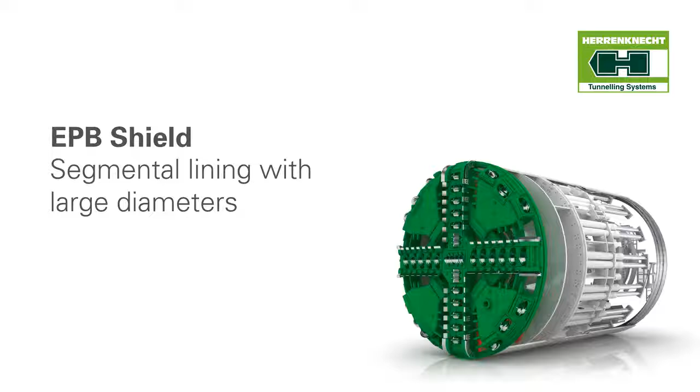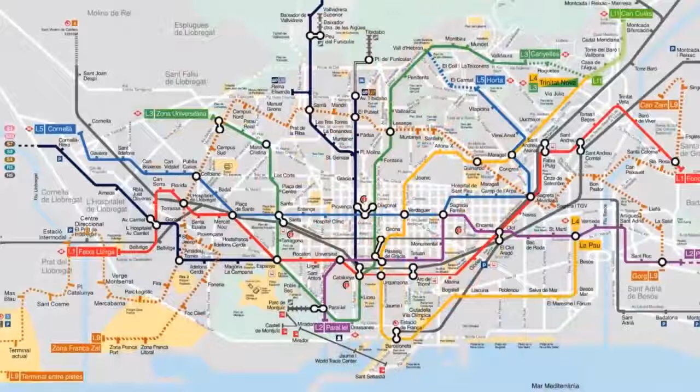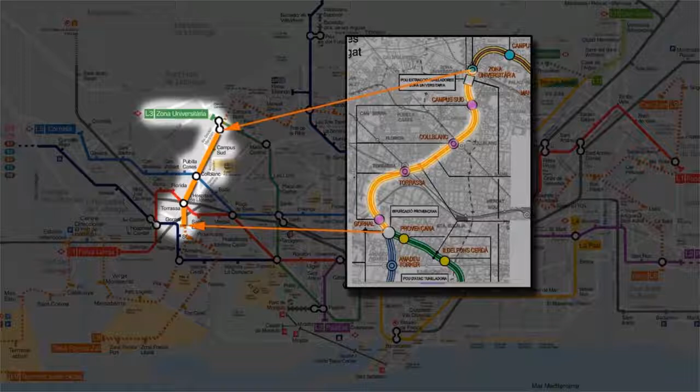The following computer animation shows the way earth pressure balance shields work, taking as an example the Herrenknecht EPB shield used for a subway construction project in Barcelona. As part of the extension of Subway Line 9, the machine S442 excavates a 3.6-kilometer-long section between the subway stations Gornal and Zona Universitaria.

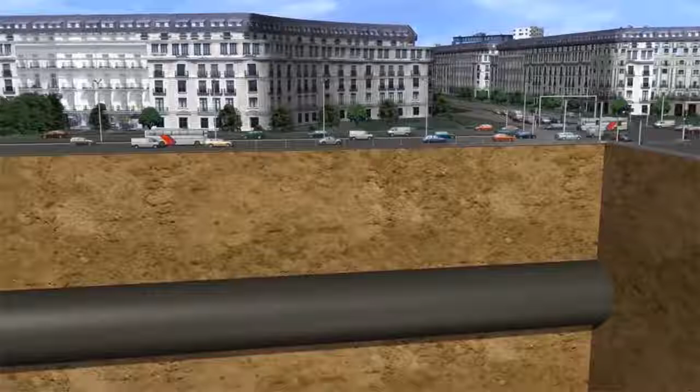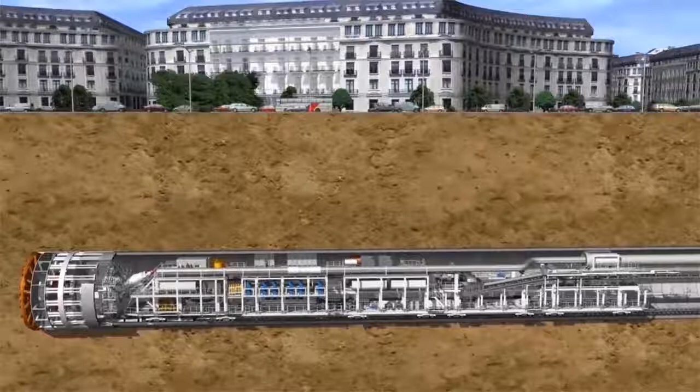The tunnel route crosses beneath Barcelona's historic city center, densely populated residential areas and roads. In order to avoid any damage to the sensitive buildings, subsidence, heave, and vibrations must be avoided at all cost. In addition, the impact on traffic above ground must remain as small as possible.

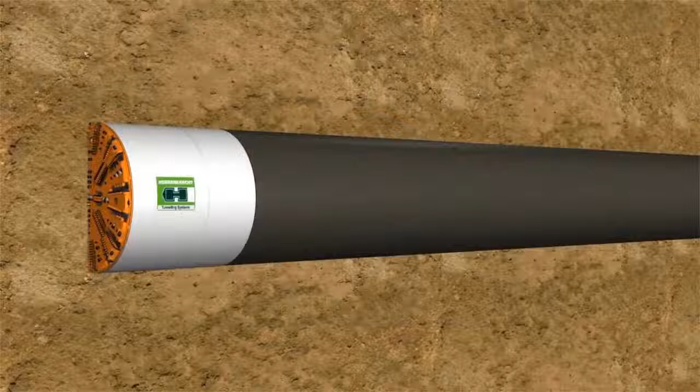The S442 is a classic EPB machine with an outer diameter of 12.06 meters and a total length of 95 meters.

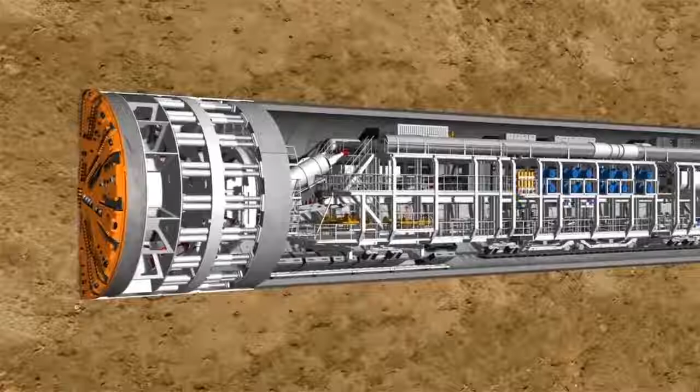With its rotating cutting wheel, the tunneling machine breaks the material from the tunnel face. The material is then transferred to the belt conveyor system in the rear of the shield via a screw conveyor, while the hydraulic cylinders press the machine forward continuously.

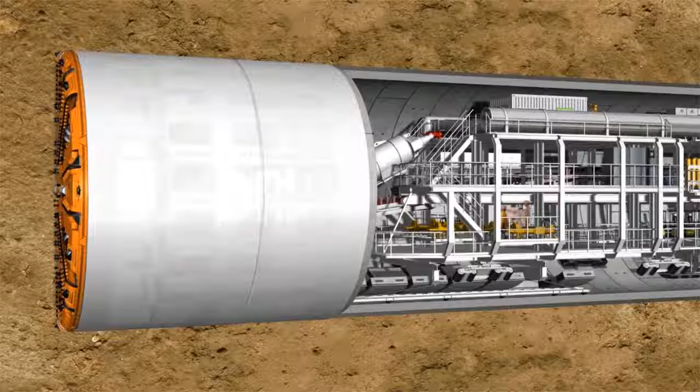The reinforced concrete segments, known as lining segments, are installed under the protection of the shield skin. When the ring building has been completed, the machine can push itself against the new tunnel ring and drill further into the soil.

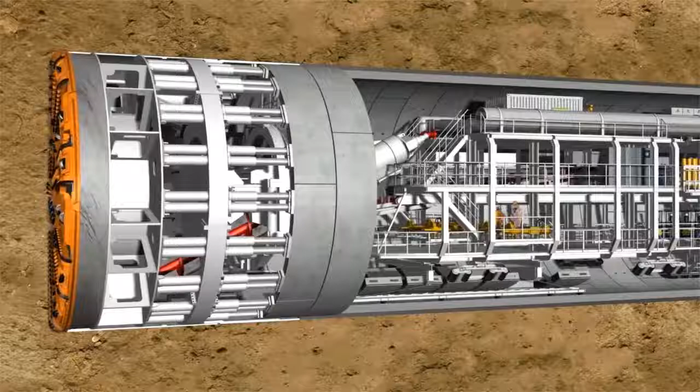The 83-meter-long backup accommodates all logistic facilities necessary for the operation of the overall system. The working method of an EPB shield is basically made up of two phases: the tunneling phase and the ring building phase.

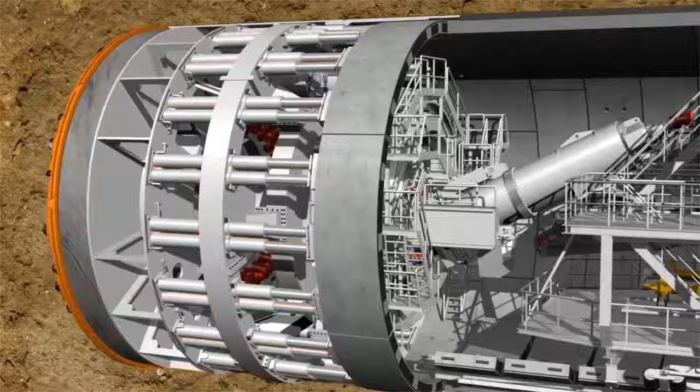During the tunneling phase, the cutting wheel, which rotates at a speed of up to 2.7 revolutions per minute, is pressed against the tunnel face with a pressure of up to 400 bar by means of hydraulic cylinders. 24 hydraulic motors drive the cutting wheel via a gear rim, developing a drilling torque of up to 38,000 kilonewton meters.

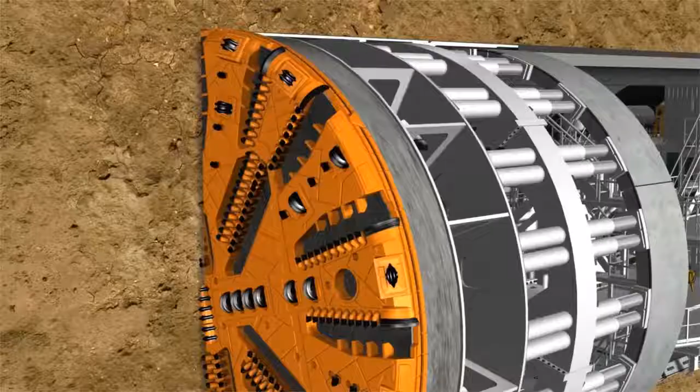Under this high pressure, the disc cutters and cutting knives made of high-strength steel loosen the material at the tunnel face.

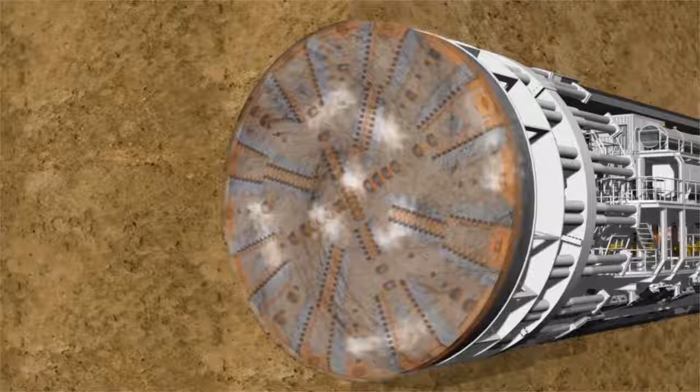If necessary, the soil can be conditioned with water, bentonite, or foam using the injection systems located on the backup. With the help of nozzles integrated into the cutting wheel, the corresponding conditioning medium is injected into the soil, which is pressed into the excavation chamber by the existing earth and groundwater pressure.

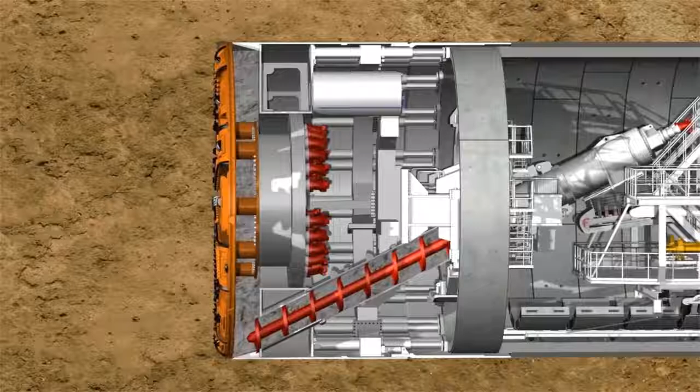For shield tunneling in non-stable soils, a loss in stability at the tunnel face is compensated by creating a support pressure. In the case of the earth pressure balance shield, the soil which was excavated by the cutting wheel is used to support the tunnel face.

In order to reach a state of equilibrium, the support pressure is transferred by the hydraulic cylinders via the bulkhead to the soil, which avoids an uncontrolled penetration.

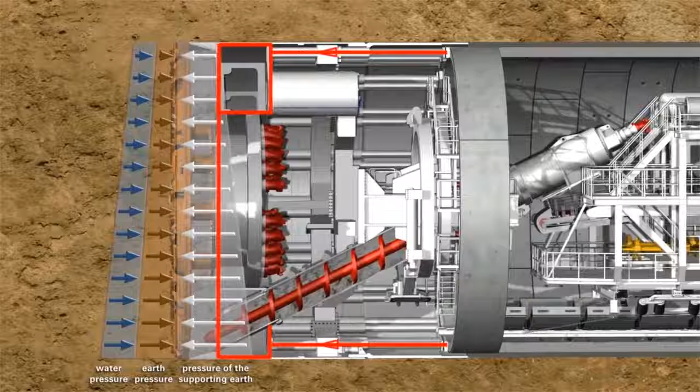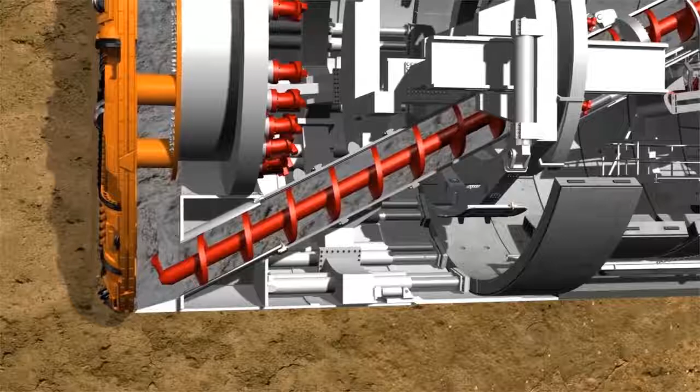The soil prepared in this way can now be transported from the invert area of the excavation chamber to a belt conveyor by a screw conveyor. The screw conveyor is driven by two hydraulic motors which have a power of up to 400 kilowatts.

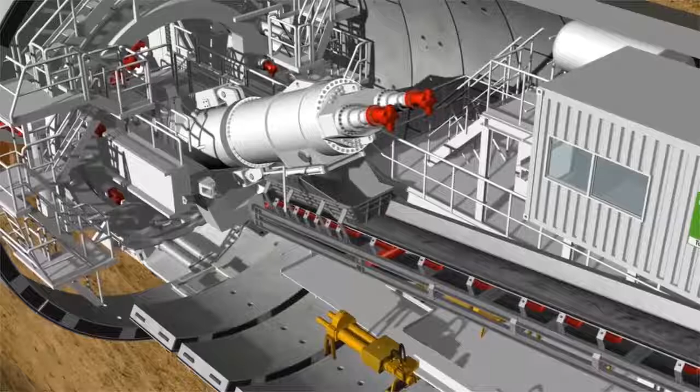The quantity of the soil taken from the excavation chamber is regulated by the screw conveyor's rotational speed, which is matched to the advance speed. The aim is to maintain a state of equilibrium between the quantity of soil removed by the screw conveyor and the quantity of soil accumulated from the shield's tunneling process. This guarantees optimum support for the tunnel face.

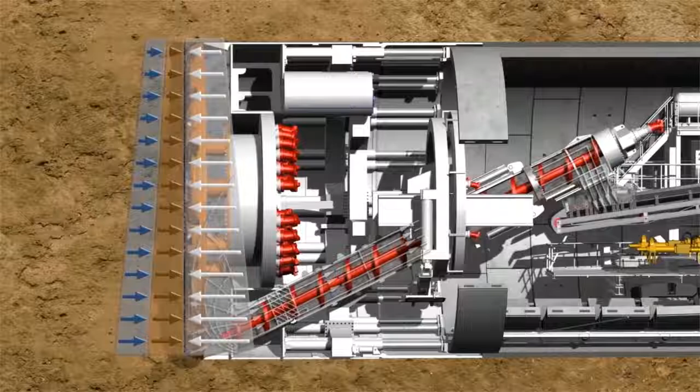The system must be able to react flexibly to the permanently changing geological conditions. Therefore, the current state is continuously controlled with the help of pressure sensors, by measuring the cutting wheel torque and the screw conveyor torque, and by monitoring the excavated material.

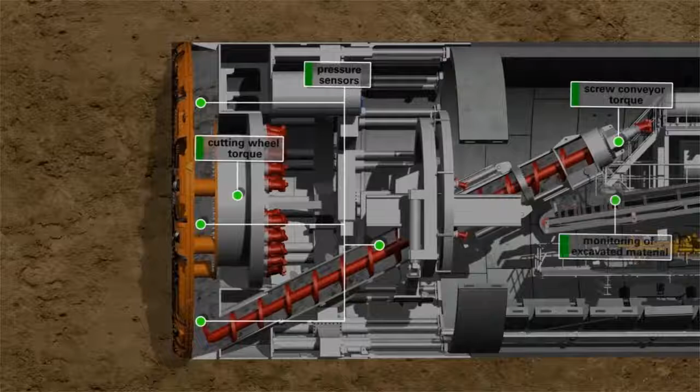When the tunneling phase is completed, cutting wheel and screw conveyor are stopped. Now the ring building phase starts in the shield area under atmospheric pressure conditions.

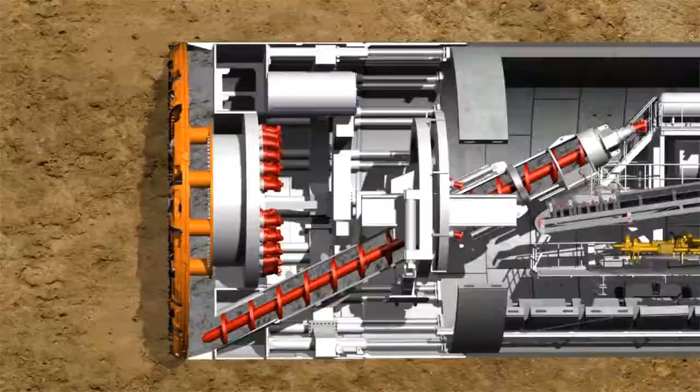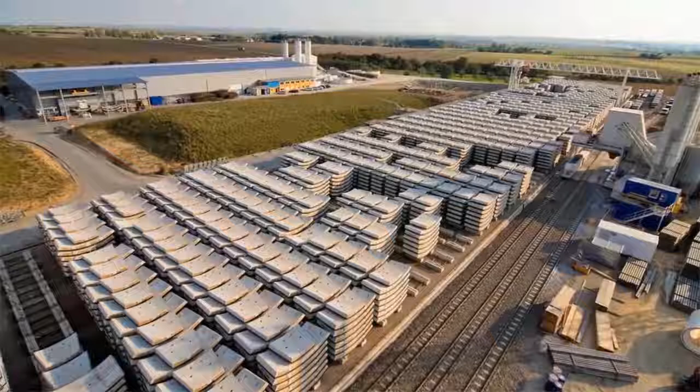A complete tunnel ring consists of several segments, called lining segments. These prefabricated reinforced concrete elements are produced with millimeter precision in a factory which is especially installed above ground for this purpose. Following quality control, they are then transported into the tunnel by mine cars.

In the front section of the backup, the lining segments are lifted individually by a special transfer crane. It lifts them onto the segment feeder which transports the elements to the front of the tunnel.

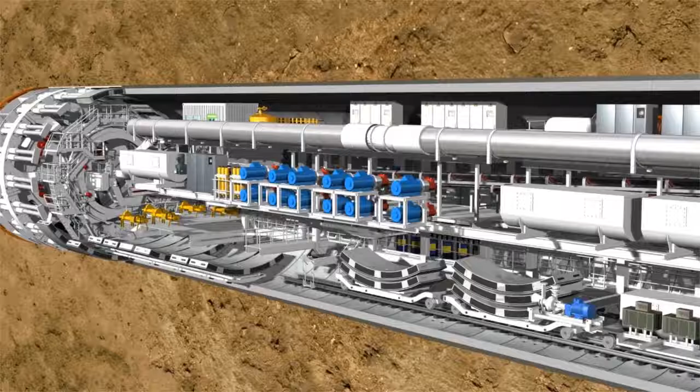The heavy ring segments are picked up and positioned by a hydraulically controlled crane arm, called the erector, using vacuum plates. The erector is installed on two rails and can be moved, rotated, and telescoped.

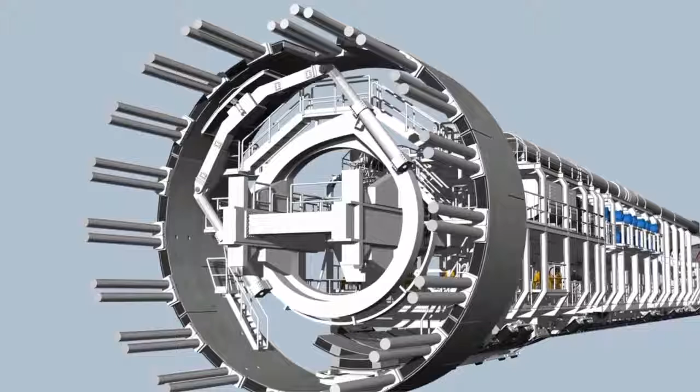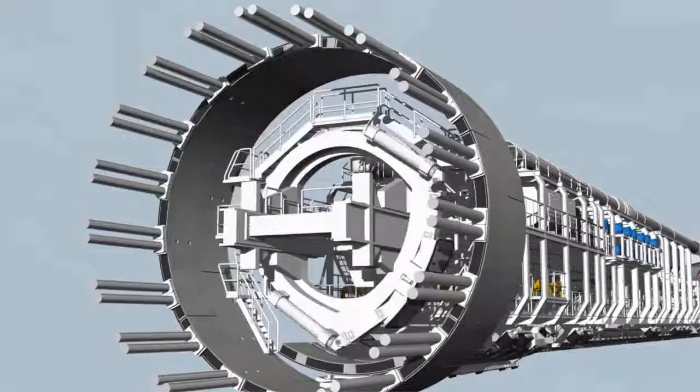Each completed tunnel ring consists of several segments, two lateral elements, and the key segment, which is installed last. The positioning of the segments always follows the same routine. The erector lifts the stone from the segment feeder, and the hydraulic cylinders are then retracted from the corresponding installation point.

The segment is positioned precisely, holding tight contact next to the previous installed ring, using a remote control. Now the hydraulic cylinders are extended again to secure the segment in its position and to subsequently bolt it into the previous ring.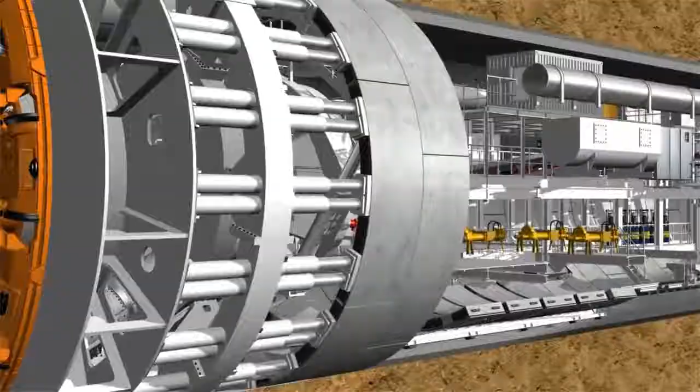During this process, machine and tunneling personnel are protected by the shield skin against the earth pressure and any possible groundwater. In this way, the lining segments are installed on each side alternately. The key segment, with its tapered sides, is slotted into position last and distributes the loads in the ring, completing the ring building. Subsequently, the next tunneling phase can start.

The end of the shield, the so-called tail skin, is equipped with a circular tail skin sealing. This provides a seal between the steel structure of the shield machine and the segment ring. This in turn guarantees the necessary sealing between the interior working space and the exterior earth pressure.

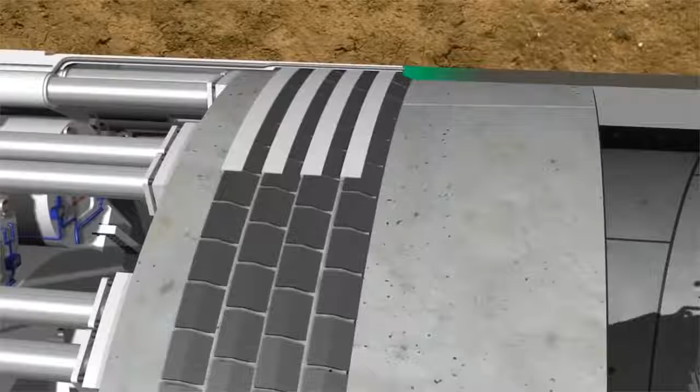The remaining annular gap between the outer side of the lining segments and the soil is continuously filled with grout via injection holes in the tail skin or in the lining segment, in order to provide a bed for the tunnel tube and to stabilize it.

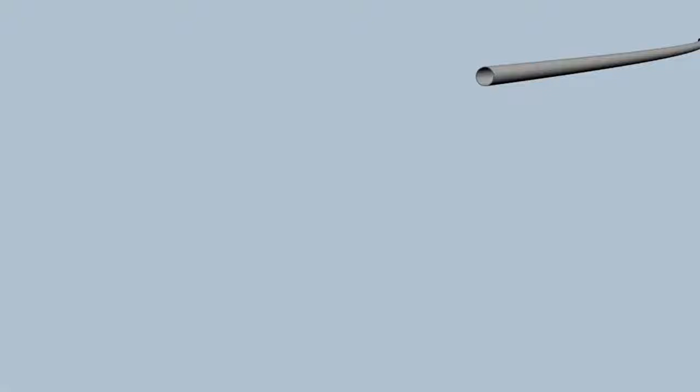Each individual tunnel ring is constructed in a slightly conical form. This means that curves can be constructed along the tunnel route by changing the installation position.

A time-lapse clearly shows the two working phases of the TBM. The tunneling phase and the ring-building phase alternate continuously. In this way, the tunnel grows ring by ring.

Under optimum conditions, up to 350 meters of tunnel can be constructed in one week. This includes the removal of up to 40,000 cubic meters of excavated material and the installation of far more than 1,000 lining segments.

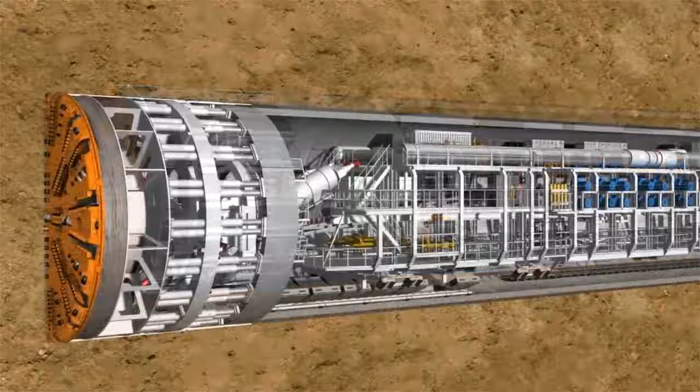Complex logistic solutions are required to deal with such quantities of material. The 83-meter-long backup of the S442 tunnel boring machine accommodates all the facilities required.

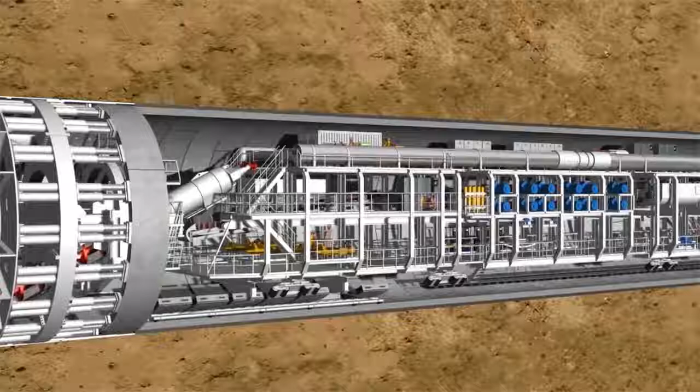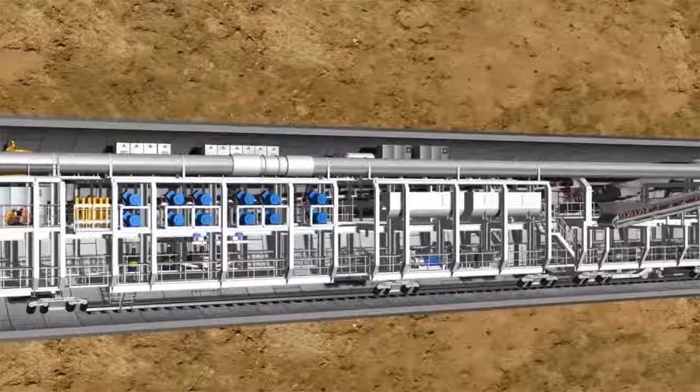With each advanced movement of the shield skin, the backup is pulled behind on wheel sets, which brace against the tunnel wall. Among other things, the steel structure accommodates hydraulic power units, pumps, switch cabinets, ventilation systems, laser instrumentation, and storage containers for soil.

In addition, logistic solutions for the delivery of the lining segments and the removal of the excavated material are located here.

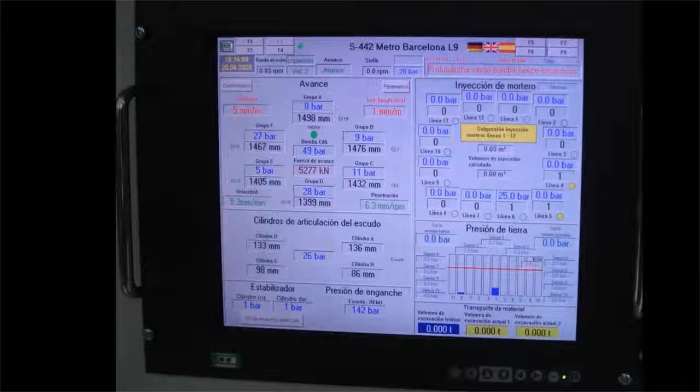All important data and up-to-date tunneling parameters are gathered together in the central control cabin. There, they are visualized on monitors and made available to the machine operator. The operator can monitor the largely automated process and intervene if necessary.

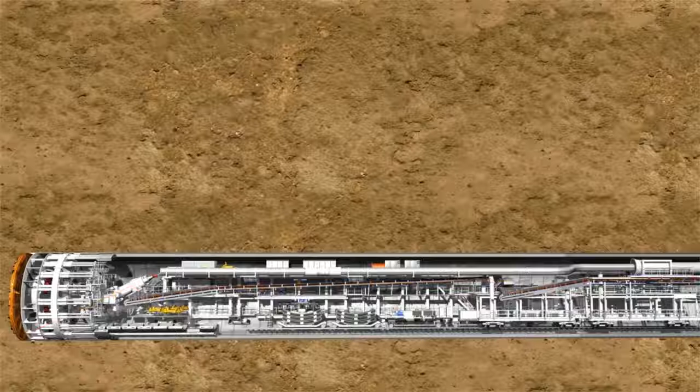In the case of EPB machines, the excavated material is mostly removed by belt conveyors. The core components of such systems are the machine belt, the cross belt, and the tunnel belt, which can measure up to 30 kilometers. The machine belt and the cross belt are two separate short conveyors permanently installed on the tunnel boring machine.

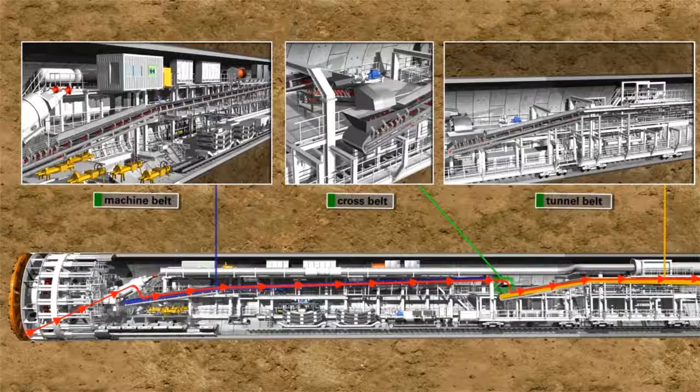The tunnel belt takes up the excavated material from the cross belt in the backup area and transports it along the total tunnel section to the launch shaft.

The front section of the tunnel belt is also permanently mounted on the backup. The rear part is statically mounted on the tunnel wall and is continuously extended during the ring building phases to match the growing conveyor distance.

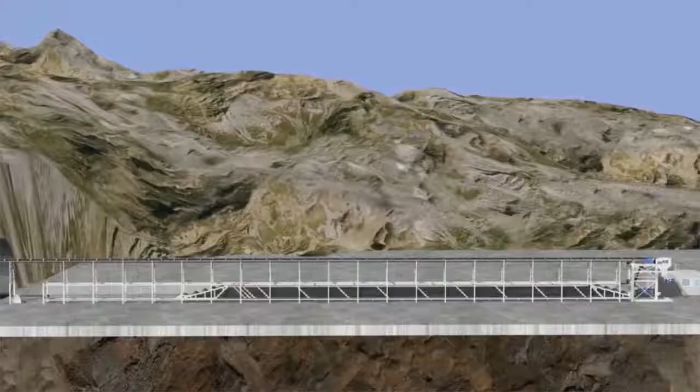In order to compensate for the increase in the conveying distance, a special belt storage system is installed at the launch shaft, which releases the extension of the tunnel belt as required.

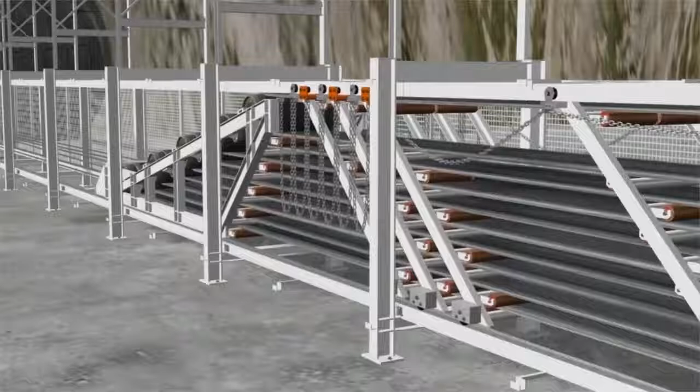The cutting tools must be maintained or replaced at regular intervals, depending on the hardness and abrasiveness of the geology. Sensors are attached at the tips of some tools, which trigger an alarm in the control cabin when a certain degree of wear is reached.

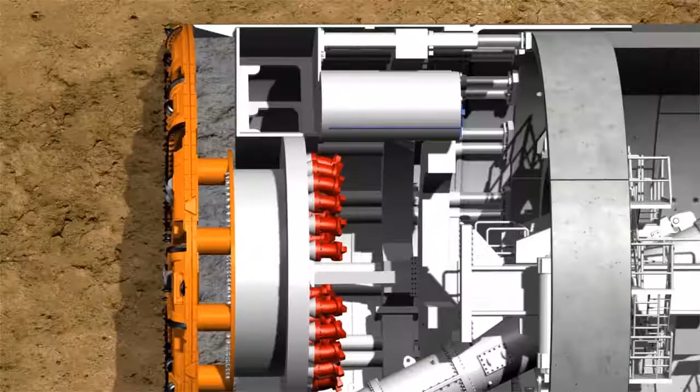If a tool must be replaced, the excavation chamber is partially emptied. At the same time, the cavity in the chamber is supplied with compressed air, if necessary, to stabilize the tunnel face. Then, the excavation chamber can be accessed through a manlock to carry out maintenance work or to replace tools.

A disc cutter is exchanged in three steps. Initially, the quick-release fasteners are loosened. Subsequently, the disc cutter is pulled out of its support with a special tool and, in a third step, replaced by a new one.

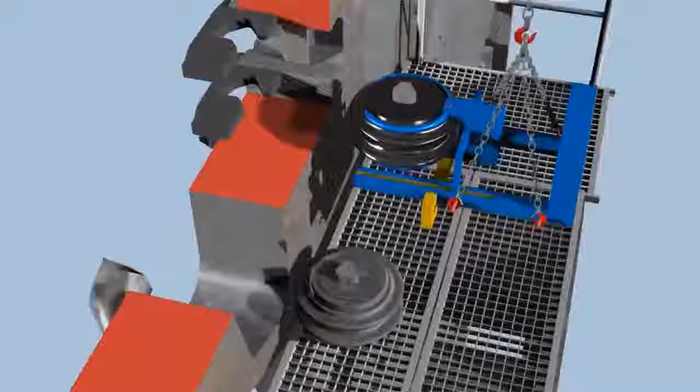Traditionally, earth pressure balance shields made by Herrenknecht are in their element in cohesive soils consisting of clay and silt with low water permeability. Moreover, loose soils consisting of sand and gravel and unstable rock can also be successfully mastered with the EPB technology.